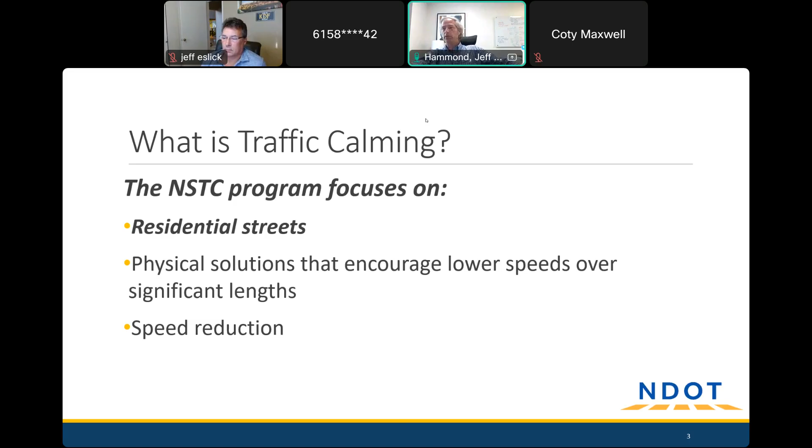We do focus on physical solutions to bring about slower speeds. Those are typically more and more things that you drive over or that you drive around. We've just found that to be the most effective way to slow traffic down. And then we do focus on speed as opposed to traffic volumes or the amount of traffic. We don't try to push traffic to other streets. I think some people wish we could do more of that, but that's certainly not our objective. We try to keep traffic on the street where it is. We just try to get people to drive a little more responsibly in your neighborhood. So that's what this program is really all about.

We recognize that we're not the only ones working in this space. We're great partners with Metro Nashville Police. A lot of people wish we could get a police cruiser out more often to sit and write tickets, and that would be a big help, and we don't disagree with that, but we also know that they have limited resources and just don't have a lot of time to sit and write tickets, and so we respect that. We do work closely with them. They're big supporters of the project, but that enforcement component is really important. We recognize that.

As is education, we'll show you a tool or two that deal with that, just making sure people are aware of their speed and the impact of speed, and some messaging that goes along with that. That's important too, but what we really focus on here is the engineering, putting things in the right of way, dealing with the infrastructure to try and bring about slower speeds.

And this is one reason we do that: speeding is certainly a safety issue. It's also a quality of life issue, particularly when it's on your street in front of your house. But we find this to be a pretty effective reminder that there are other people on the street besides those of us who are driving, and so our speed and how we operate our vehicles can have a really big impact, sometimes a life and death impact, unfortunately, on other people trying to use our streets. This is just a reminder of the impact of speed on pedestrians if there is unfortunately a pedestrian crash.

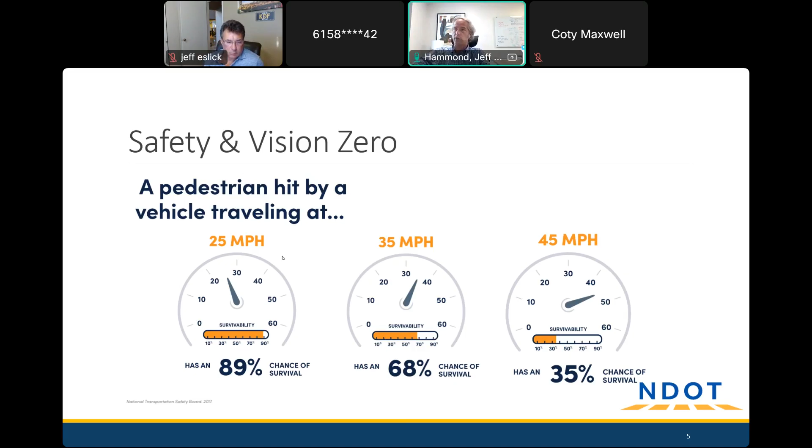We also like to remind people that if you're having speeding issues on your street, you're in good company. Right now, we are sitting on a backlog of about 600 streets where people have applied, just like you have on Big Horn, to get some assistance with speed on their street. That's unfortunate, and it's also unfortunate we can only address about 50 projects in a year, but it does give you some recognition for maybe where you stand in terms of that. You would have been in the top 25 of this last cohort of projects, so you get both a congratulations and an I'm sorry, because that means you've got some issues, and NDOT recognizes that. So we hope we can help through this process.

We'd like to remind you of Hub Nashville as well. If you're not familiar with it, it's a great clearinghouse. It's kind of like our application process, specifically the traffic calming, but Hub Nashville is much more general and has a lot more to it than just transportation. So you can go to hub.nashville.gov or call 311, and it's just a great way to handle all things requested of local government there.

A little bit more about the data that we use. So when an application came in for the street, as they have for all 600 of those streets, we start collecting data, and then we use that data to prioritize which projects we're going to go offer on streets. Big Horn has received one of those. You don't have to worry about funding or recompeting at this point. We're here now to help determine what that project looks like for you. So this is how we got here.

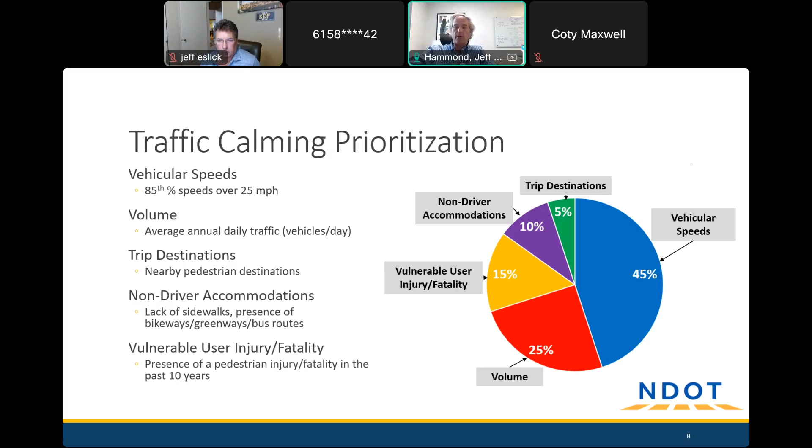About 70% of the scoring, the prioritization scoring, comes from traffic behavior, whether that's the amount of traffic on the street, the volume, how many cars a day you're traveling, or how fast they're going. That's probably pretty evident that we would use that data, and that's the bulk of our score. But the other 30% is really important too, and that gets back to those other types of users. So do you have sidewalks on the street? Is there transit service nearby? Or are there places that people may want to walk to or bicycle to, like parks or libraries or schools? All of that kind of information goes into our scoring process as well, as does a documented instance of a pedestrian crash. So if you have any or all of those things, that gets rolled into it, and that's how we make the decision, and that's how Big Horn got introduced into the program.

What is a little bit unique on Big Horn is that it is a very wide street. I'm sure y'all are familiar with that. It's about 36 feet wide, maybe 37. We have not been on site yet, but that measurement's pretty close. We will refine that as we get a little deeper into the project. That makes a difference in terms of how we design a project, so we'll talk more about that in a minute.

It's not a concern, it doesn't change our mind or anything like that. We just need to know that going in, like how much street width are we talking about. And the project is just about a quarter of a mile long.

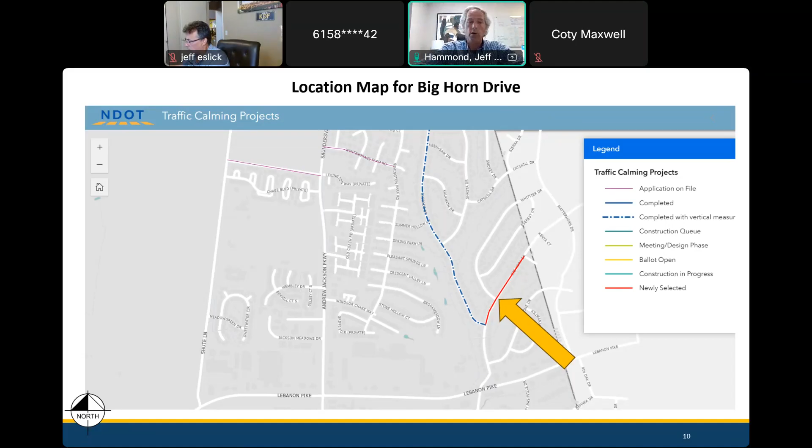A few of the tools we use - most people in the county have now encountered our speed cushions. It's really become the bread and butter of this program, used way more than anything else, probably because they work and are pretty effective. It's a very high density rubber, manufactured, so they're all the same dimensions and feel the same to the driver. They sit in the lanes so we can configure them. We're very familiar with how they work and how well they hold up, so we continue using the same speed cushions from the same manufacturer.

They're all 6 feet wide, which means they can't really be straddled by a car, although some vehicles get pretty close - like ambulances, fire trucks, and other emergency responders with bigger wheelbase vehicles. We don't want them hampered too much by a speed cushion, so that's why there are gaps in between them so emergency vehicles can get where they need to be.

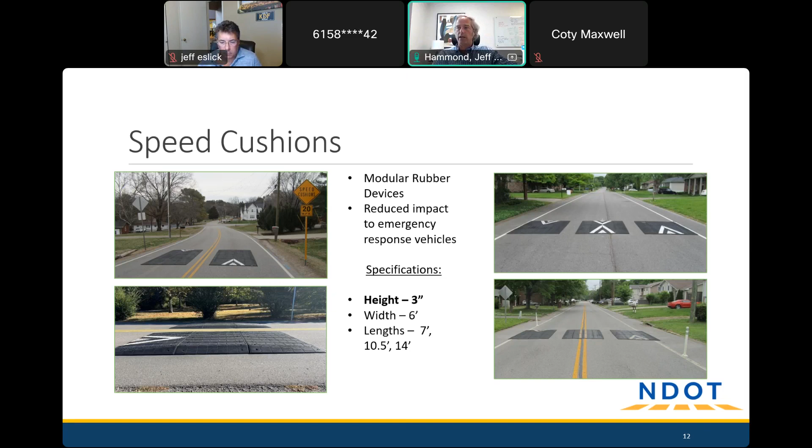We can also vary the length of the speed cushion in the direction of traffic. Our standard is 10.5 feet long, but we can shrink it down to 7 feet if we want something really aggressive, or lengthen it to 14 feet for something smoother and more comfortable - though that also lets you drive faster. That's why we've honed in on 10.5 feet as our default for most applications.

Another tool we have available is really a close cousin of the speed cushion: the speed table, made by the same manufacturer, just a little different configuration. The obvious difference is we don't have those breaks, which means we don't get as small of an impact on our emergency response. For that reason, we don't use these as often, and we try to be careful about where we deploy them. You'll see them sometimes in parks, where emergency response might not be as much of an issue. Otherwise they're about the same, just a little longer and wider, but they work about the same way.

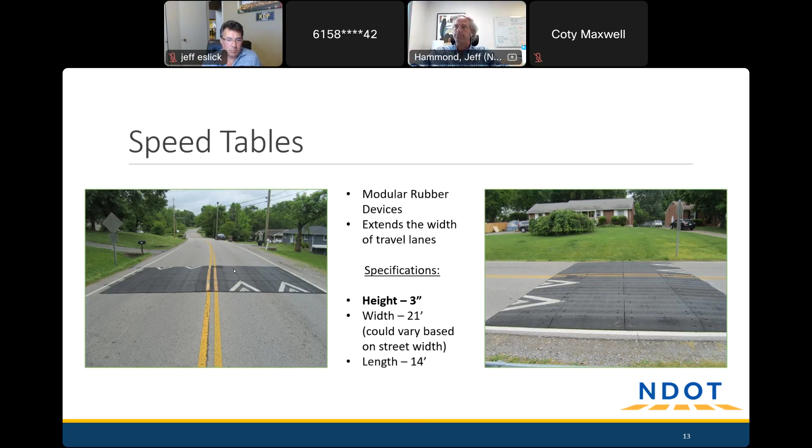We do have some before and after data on speed cushions and their impact, but not a whole lot. I don't talk too much about it because every street is different and starting from a different speed. But we are seeing consistently slower speeds, an average of 9 to 12 miles an hour, in a before versus after condition.

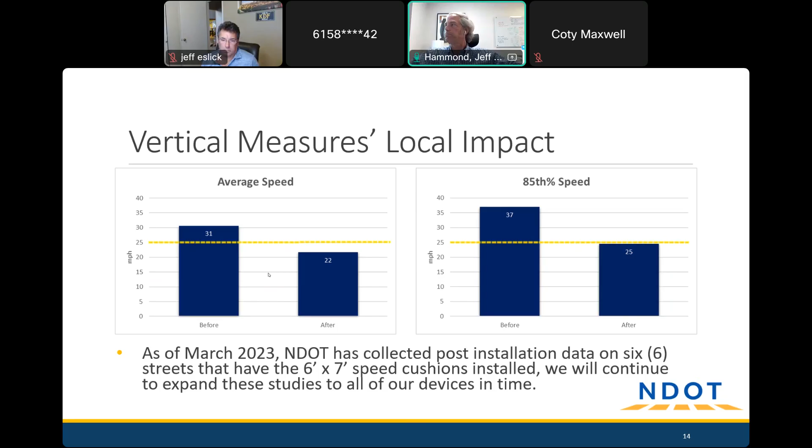Another tool we have available that doesn't involve putting something in the road is the radar feedback sign. You'll see these fairly frequently in neighborhoods. This gets to that education component where, if we can remind drivers how fast they're driving and that we're hoping for slower speeds, it can be helpful. Some neighborhoods, these have gone in and residents absolutely swear by them. Others say it worked pretty well at first but seems to have lost some effectiveness. I can understand both of those perceptions.

We don't have as much before and after data on these, especially in the long term, and I think that's more of the concern: if you drive past this every day for a long period of time, does it still have that effectiveness it might have had in the beginning? But it can be a helpful tool, particularly when we can't use speed cushions.

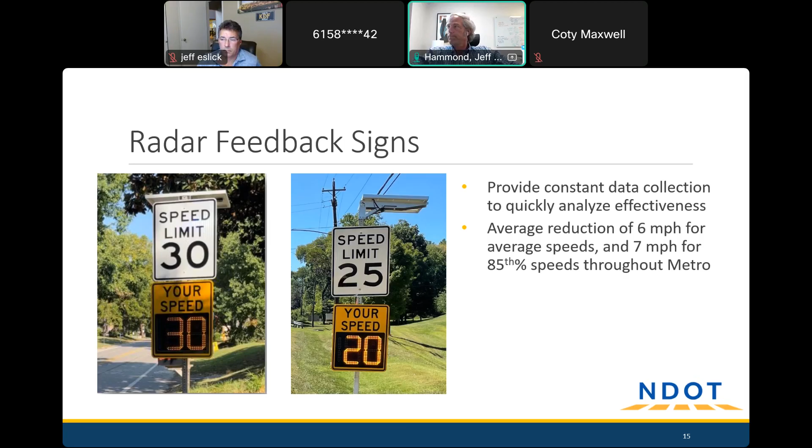Was there a question there? Sorry, I heard something.

Another tool we can use is, if we can visually narrow a street, to do that using something as basic as pavement markings. We will do that. Some streets have no markings whatsoever, others have a full complement of edge lines and center lines, so we will introduce those sometimes. Or if there's marking out there that's totally faded, we can use this as a way to get our markings refreshed. That can also be helpful.

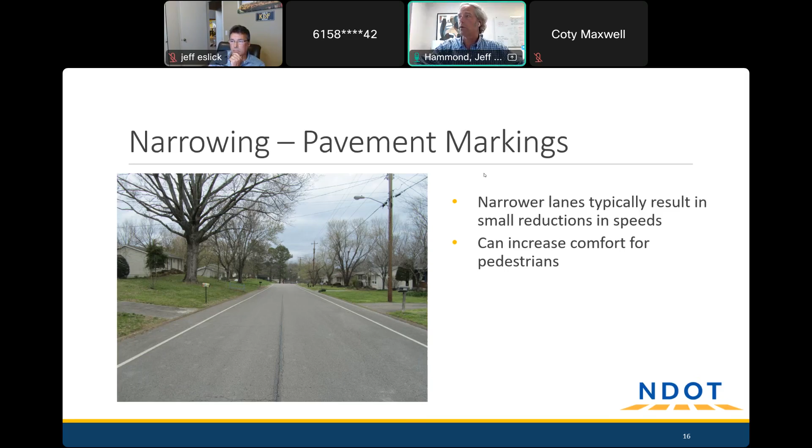Some specific, more involved examples in more urban areas are bulb outs, where we have big, wide, sweeping radiuses, trying to bring about slower speeds turning onto and off of a street. These can be helpful, and they're also great for pedestrians in terms of shortening the crossing distance of the street.

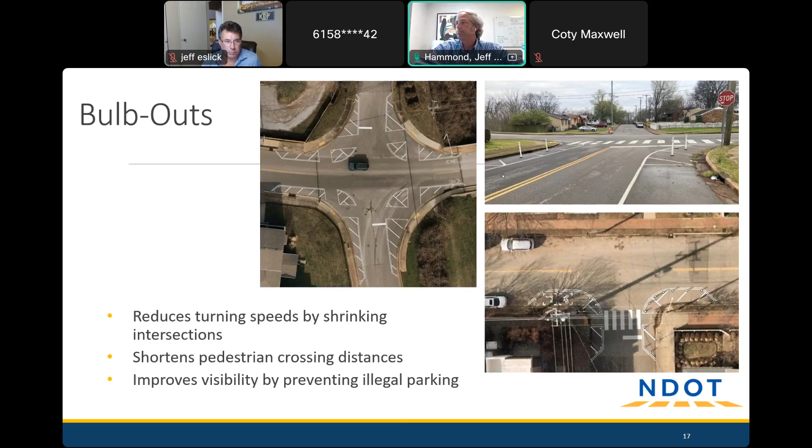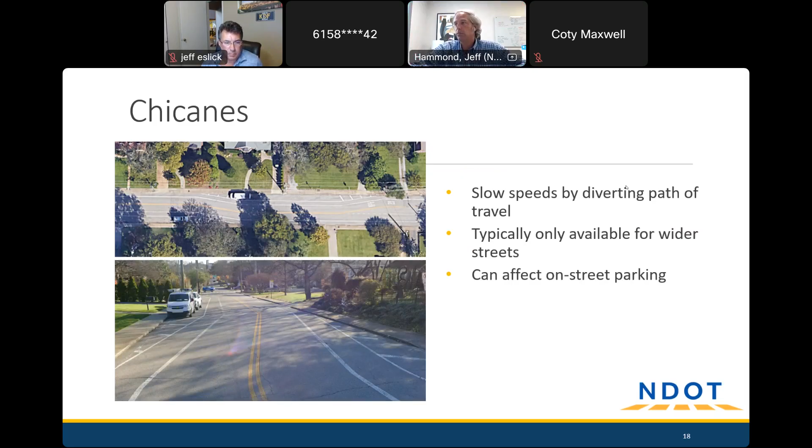Chicanes are another, more urban treatment. It's been used on a couple of streets in Nashville, not very many, but it introduces an artificial meandering of traffic. It works okay if there's parking, like you see here, something that physically makes you meander out of the way. So that's something we don't use very often, but we can.

And then traffic circles are another one. This is one that kind of comes and goes. I think NDOT would like to see a few more of these currently, but conditions have to be pretty right because this takes a lot of pavement. It takes a pretty big intersection for a traffic circle to work well, and we also have to be careful about larger vehicles. School buses are one of the main ones we want to be sure can turn around these or navigate the intersection. But they can be effective, particularly if we're looking at traffic calming on two different streets.

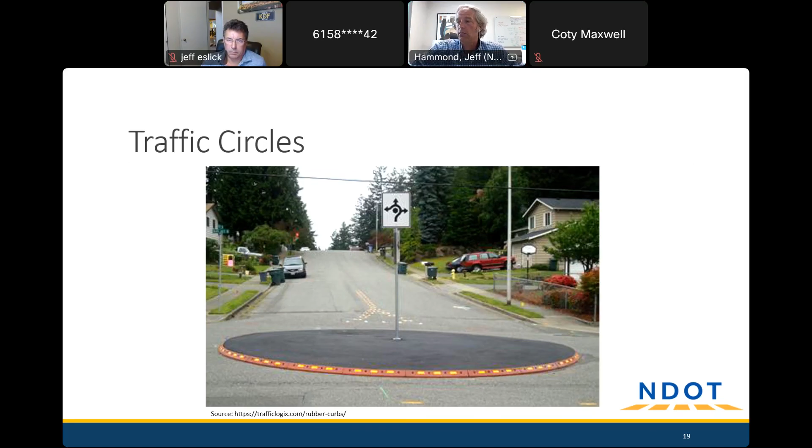And also a traffic circle planned for the intersection of Cascade and Bighorn. That's different - we don't recommend those very often, but I think it may be a good fit here because you already have traffic calming on Cascade.

Bighorn is slated to get traffic calming, and that's an awful lot of pavement out there. Those are both very wide streets. So I think we could certainly design something to fit that in and see if it works. But we're open to, we want to hear from you. If you don't like the idea, no problem at all.

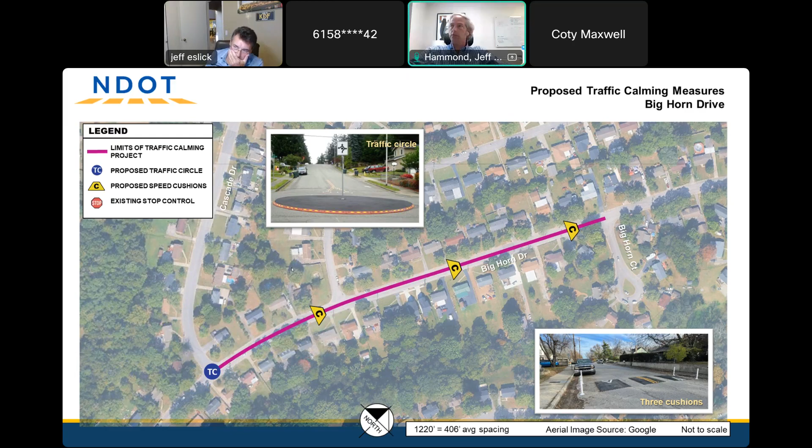What we'll do is go back to the drawing board and finish fleshing out a concept. It sounds like we want to remove the circle and replace it with that 4th cushion just on the south side of Cascade. We'll work on that and finish the design. At that point, we're happy to come back and show you, but if you want to take our word for it, since it's a pretty minor change, we don't have to do a second meeting. That's totally up to y'all. A lot of neighborhoods, if we're close on the plan, say let's move it forward and save the time. That's fine, but we're happy to come back either way.

In any event, whatever we do with that, the next step is the ballot process. I'll talk a bit more about that. The ballot process is required for all of our projects, and if that does pass, we would move it into the construction queue.

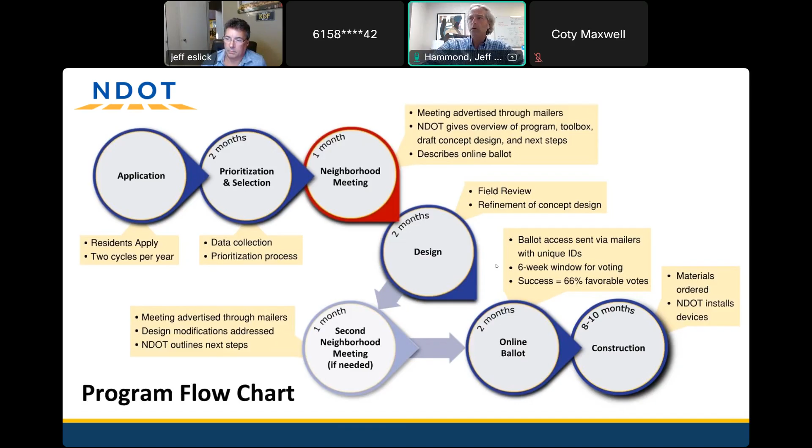Don't expect that by school starting time you're going to have speed cushions out here — it doesn't go that fast. If everything goes smoothly and we streamline as much as possible, we're still probably close to a year before anything would be implemented. NDOT's working really hard and has made some great steps, I think they have a second contractor now, but there's just a big backlog of these projects to be installed. So we like to set that expectation with you.

On the ballot process, we would send you a card, hopefully you received one for this meeting, and we'd send something similar for the ballot. There's a QR code you use to vote online, saying yes you're for it or no you're not, and you can also call it in by phone. We keep that open for 6 weeks, and at the end we tally everything. If 2/3 of the people who voted are in favor, we'll move the project forward. That's how it works.

The people who get to vote are those who own property that abuts the right of way of Bighorn Drive in this segment, from Cascade to Bighorn. If we move it to the other side of Cascade, we'll extend those voting rights to the people impacted on the south side. But no businesses and no vacant properties — I think everything here is residential. It does look like there's at least one property with two owners.

Those people both get to vote. If anybody owns more than one piece of property, they only get to vote one time. So there's a few little intricacies to it, but for the most part, it's anybody who owns the property in between. I do point out that it is owners, not the property itself.

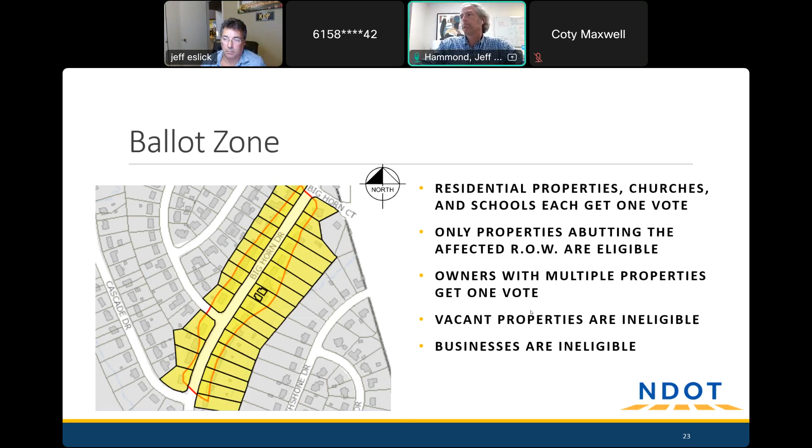I've heard you tonight. You don't necessarily have to go back in and regurgitate all that to us, but we sure do like having that written feedback as well. So I always encourage you to do that if you're so inclined.